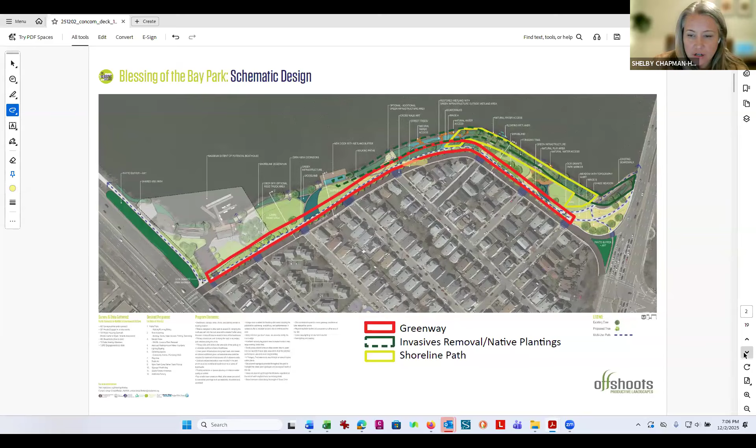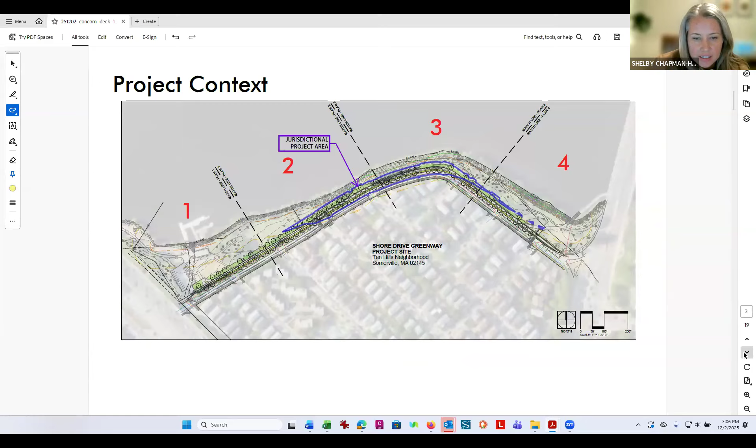So we're just going to really quickly take you through some existing site photos in case you're not frequently in this part of Somerville. So we'll go from page left to right, that's west to east, starting over by Mystic Ave, where the 1 is, over to the Fellsway by the 4. So if we go to the next page. So here you can see some existing conditions. This is over by the Blessing of the Bay Boathouse on the far west portion of the project site.

And when we get to the plan proposals, you'll see we were really working with DCR and City of Somerville to try to stick to that plan that the community developed back in 2018 and tried really hard to look at a lot of alternatives and really analyze the site to say, how can we maximize reusing existing hardscape? So you'll see that where we have now existing on Shore Drive a parking aisle, two-way drive aisle, and a bike lane, and then a sidewalk that's starting to get into the Blessing of the Bay Park area.

Our proposed adjustments go into the bike lanes and reclaim a little bit of that space to create a planted vegetated strip that has a couple of different functions between the roadway and the existing sidewalk. You can see there's some existing trees very close to where we are working. We are proposing removing 10 trees that are non-native or invasive species that would have significant impact from the work coming right up to the trunks. And you'll see in a minute, we have 88 new trees that we're proposing as well to replace those. So that's a very typical condition.

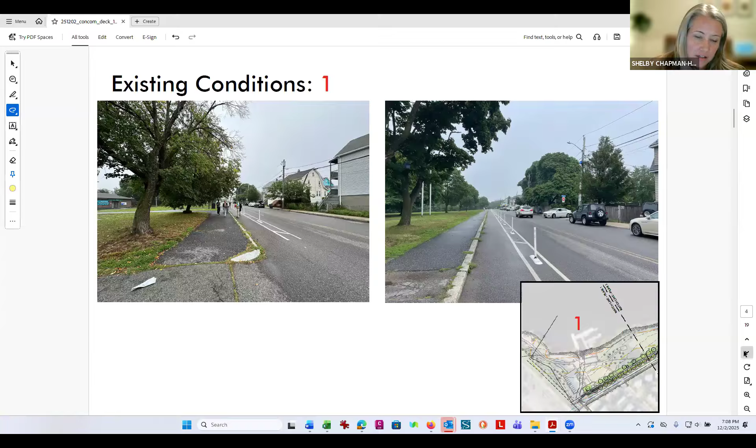And then we go down, moving towards the east here, you can see there's some areas where it's a little bit more opened up and park-like, but that same kind of condition of two drive aisles, parking, roadways, all very similar through that space. There's some areas where there's some traffic calming existing, which is really great that we're working with.

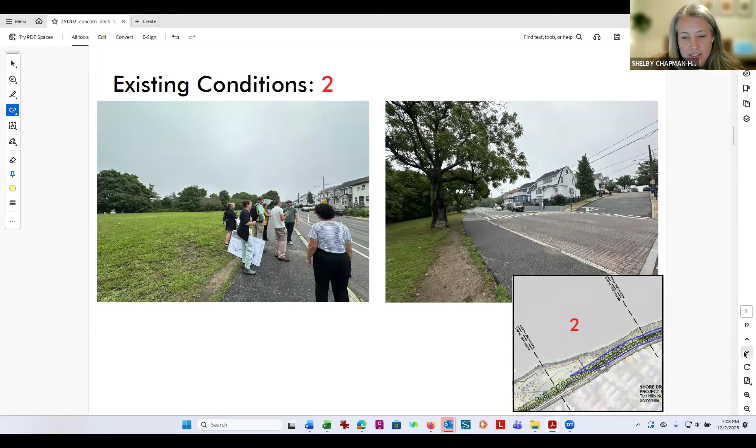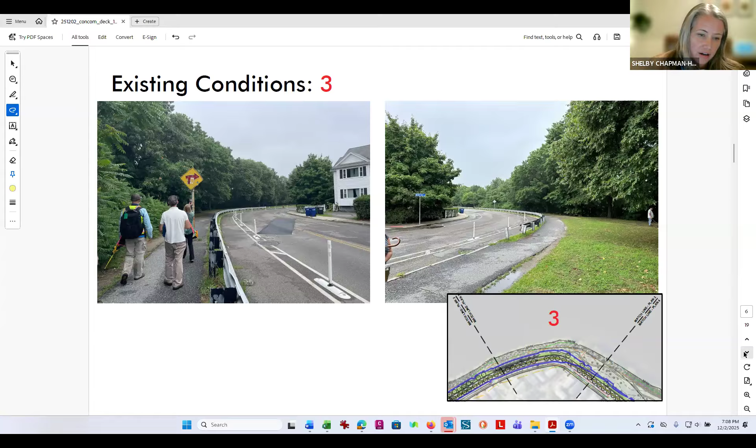And then if we go to the next plan, there is one area that gets a little bit pinched, but there's actually extra roadway width there due to the turning radius of the cars. So still plenty of space to work within for trying to really reduce our impact on the existing areas that aren't paved.

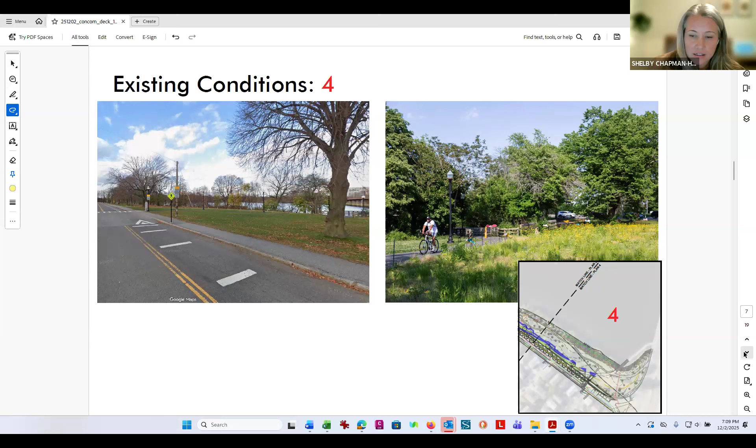And then if we go to the last slide, we are on the east side of the site near the boardwalk where you can go down under to get to Baxter Park and Assembly. This is the area where we've been to you guys a few times about various parts that we've picked off over time, including adding the native pollinator meadow and native shoreline restoration. So considering all of those aspects as we go through the proposed plans, I'll hand it over to Brian to start to walk us through the proposal.

We do have a couple resource areas within the park, and although there's multiple jurisdictional areas present, all of the proposed activities associated with this project are confined to the upland portion or the 100-foot buffer zone to the BVW and the bank.

And then the underlying soils, as you can imagine, it's mostly a fill type of material. And we did complete some site soil evaluations in December of last year, December 6th, almost a year from this current date. And that was used to help inform the stormwater management decisions that you'll see tonight.

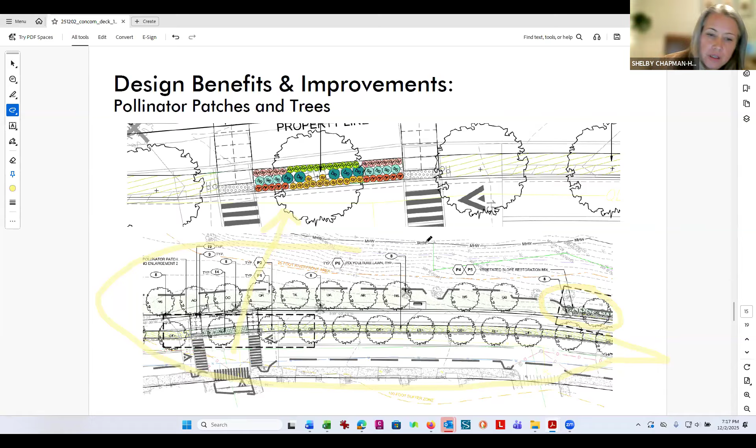And then there is a small patch of restoration on the far right side of that bottom overall plan. You can see a green hatch north of the shared use path, where that tight area is a little bit more wooded in the existing condition, restoring that back with appropriate native woodland edge species. That's it for the planting part. I'll just turn it back over to you, Brian.

Just walk through this really quickly. The roadway is being reduced, as I mentioned, so there's a reduction in the impervious cover. Because we are making this a shared multi-use path, there is some path widening that increases that impervious cover, and there's a little bit of trail surface aggregate that we're using in the connection points, and I think for some of the bench areas. But overall, we're still providing a reduction in impervious cover, and it's really swapping the pathway impervious with roadway. So we see that as a win as well.

I think it's also important to note that the lawn area, there's a pretty good reduction there, and that's due to the addition of that landscape strip that Shelby mentioned, as well as the pollinator plantings and some restoration plantings as well. So I think overall, it's a project that should provide some benefits to the abutting resources.

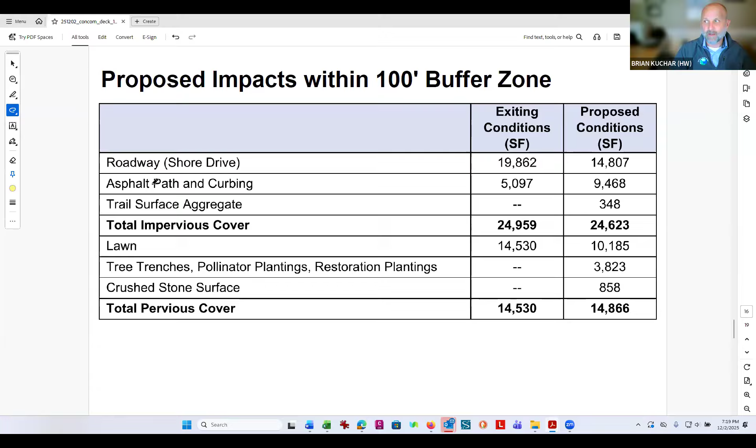And I think at that point, I am going to stop talking and let you all weigh in. I will keep sharing my screen in case there are things people want us to go back to, or if it's helpful when we're answering questions, or if not, I can stop sharing so we can all see each other again. Why don't you keep it up for now? Because I think some of the questions might want us to go back to them. I do want to open it up to fellow commissioners. Does anyone have any questions?

If no one does, I do have a couple questions. The first question I had is with regard to the tree removal plan, Shelby, that you referred to. I was wondering whether we have received a map that marks the trees that are planned for removal, and whether you've been working with Malik or our other tree specialists. Yes. So we've been working closely with the folks at PSUF, and we've been working with Vanessa Buckley. And in the plans in the NOI, there is a demo plan that shows the trees noted for removal.

Okay. And then I was just going to say that I can second that too. So I'm Meg Koglin. I have video off because I'm actually on vacation right now, but this is an important meeting, so I wanted to be here.

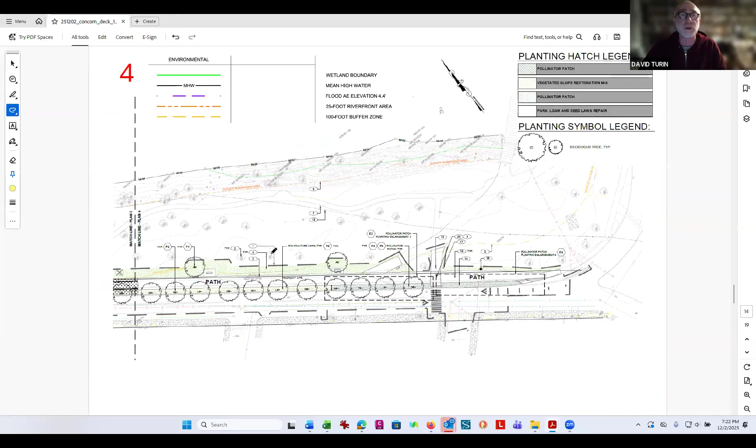The question I had about the path, and I feel like every different NOI, what I'm getting to is pervious versus impervious material for the path. You guys have chosen impervious. I know some projects come before us with the decision to put pervious pavement. Like 207. That decision. Yeah, I can speak to that. We did look at porous materials for the pathway. There were some challenges as it relates to the water table and the soil conditions there for infiltration. And in fact, we are under draining our tree trenches because of that reason, that we don't really have well-drained soils. And then we're trying to maintain separation from the water table as well.

So due to the high water table and the soils, and there were some other factors that weighed in as well from the design side, we decided that we would use just the more traditional pavement, but keep in mind that we are including the structural sand-based soils underneath, and we are using underneath that pathway for stormwater storage. So you are getting some of that benefit of the porous, you're just not getting the direct surface infiltration. And that's actually a good segue. Can you talk a little more about the stormwater treatment that you're putting in?

Sure. So there are the tree trenches, which I pointed out here. There's 4 of them. The way that this works is the water comes down the gutter line, enters into this small sediment forebay that would allow your solids and trash and debris to settle out. Easy maintenance that someone can go in and just clean that space. It would then overflow for the water quality volume, again, sized. Some of them are slightly under, but again, we're trying to meet to the maximum extent practicable based upon some of the utilities that are out there, which created some challenges as far as putting stormwater into the ground.

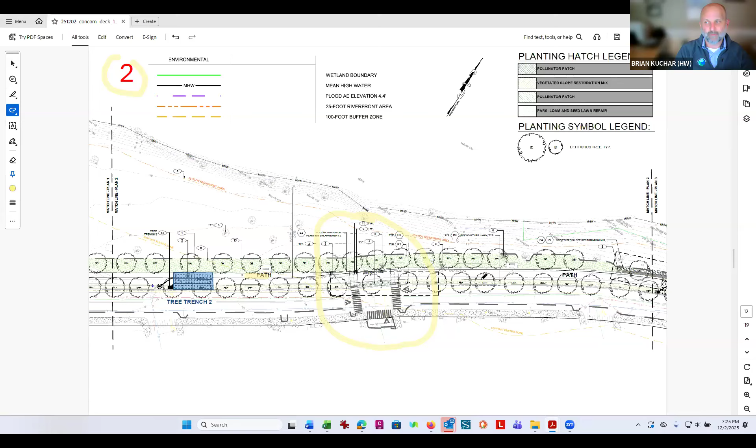So there'll be some sort of a regulator structure or a passive regulator structure to direct the first flow into that detention basin, and the overflow will then pop out again? Yep, that's absolutely correct. It will come into this, there'll be a slight depression, and there's an inlet in the curb line here, hopefully I don't lose my screen when I do this, okay, that will allow that water to get in.

And really what's regulating the flow is this structure here, which I believe is a 12-inch PVC drain basin, and then the pipe, which I believe is 6 inches. So that's really regulating the water quality. And then when this fills up, the water is just going to continue on in the gutter line. It's a more cost-effective approach because it doesn't require us to put a much larger structure in and make these connections. And it really allows this system to just take the water quality volume, or as I said, in this case, probably slightly less than the 1 inch, but definitely the ½ inch. Okay.

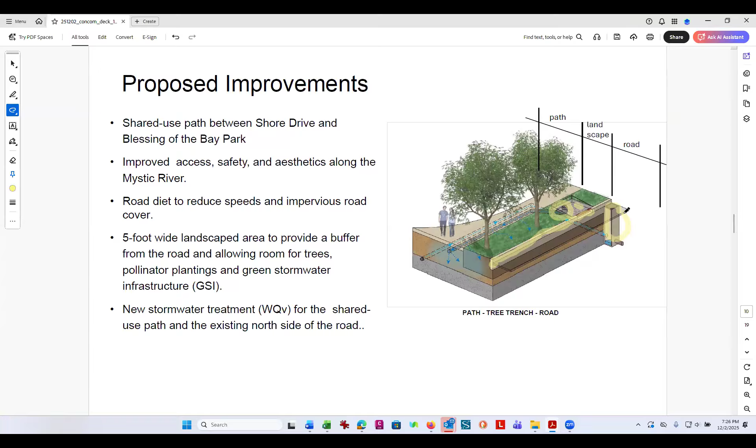Any commissioners, anyone else have questions? Yeah, I do. I was wondering, for the area that's in the 100-foot buffer zone, what are you doing for sediment controls? Just to clarify, you're talking about during construction, correct? Yes. So we do have an erosion control plan and site preparation plan that we submitted. We have silt sock. I can pull that plan up. Hold on a second. Are you seeing the new plan set, or are you still seeing the presentation? Yes.

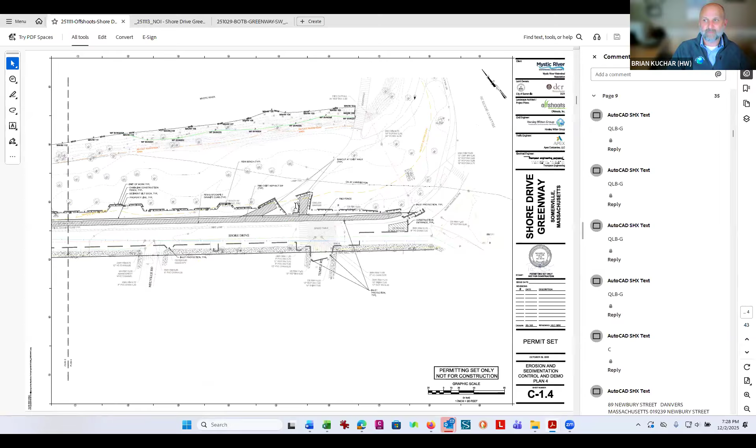So on the erosion and sediment control plans, we have a silt sock along the perimeter within the landscape to protect any runoff that may be leaving the site. The good news is this site's relatively flat, and I think stormwater management during construction should be not too complicated. We also have silt sacks going into all of the catch basin structures, not only the ones we're disturbing or working with, but any catch basin within the limit of work because of vehicle tracking or things like that. We also have made contingencies for some level of vehicle tracking once the construction access point is determined.

Yeah, go on, Michael. I was gonna say, you feel confident that nothing is gonna be running off from this work site into the river? As long as the contractor follows the erosion control plan, yeah, I think it should sufficiently protect it. And who's gonna be keeping track of this? In terms of the contractor, you mean? Yeah, because last time you guys were a little lax on your erosion controls, so I'm a little concerned about that.

I would love to learn more about what project it is that you're referencing, but the PSUF, the Public Space and Urban Forestry team, will be the project manager on this for construction. And we would be working very closely with Offshoots as the licensed landscape architect on the project, so we would be the ones that oversee construction. Okay. As the designers of record, we wouldn't be doing daily observation of construction, but we would be out there to do spot inspections, and we're usually pretty vigilant on the erosion control when we go out there.

So even if we're not specifically out there to check erosion control, we're typically looking where sediment may have accumulated, because that's when you run into problems, right? If they haven't cleaned up when the erosion controls are doing their job, and then you get a big rain event and it overtops it. And we typically manage by weekly site visits. And if there's a particular need to go more often, my experience on the PSUF team on active projects is we will make a point of going there if it's needed, but generally speaking, once a week.

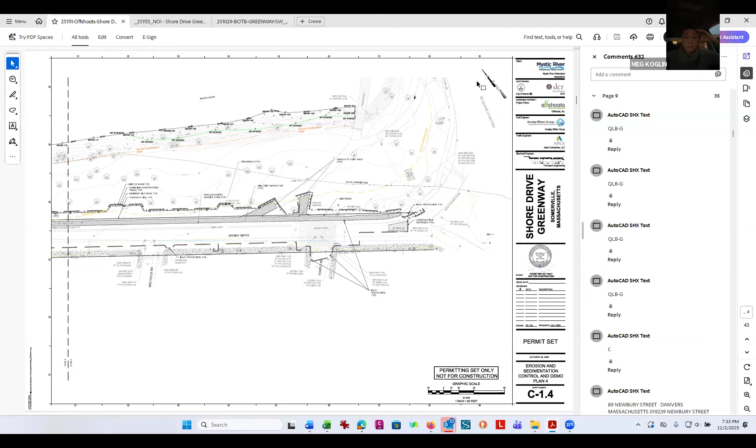I should have started with this. It looks like a great project. I think all the improvements along the waterfront there are broadly welcomed, and I should have said that before starting the questioning. So thank you for coming to us with this project. Thank you.

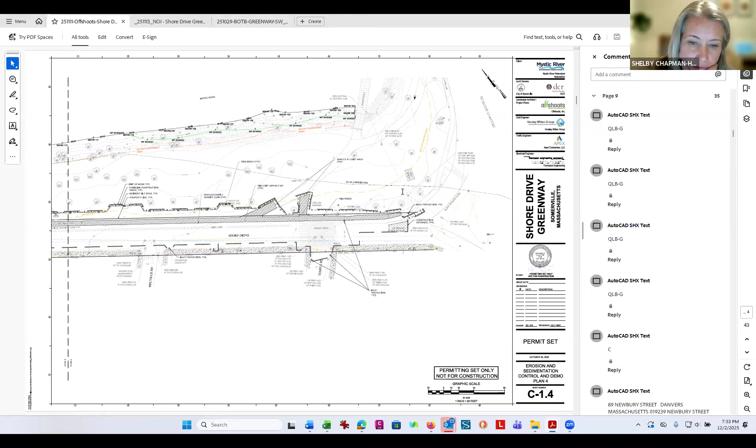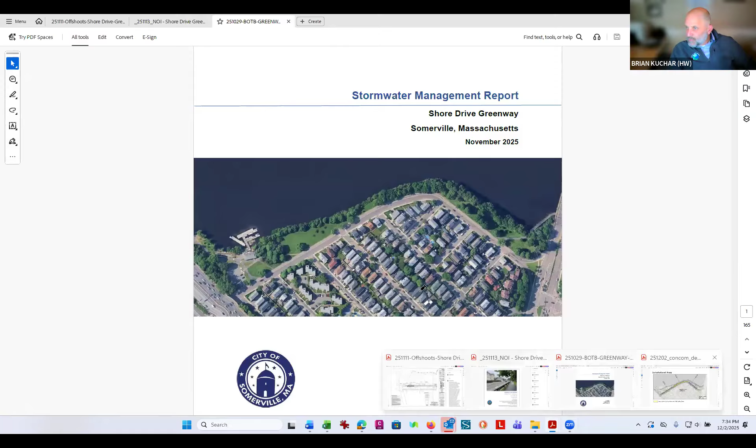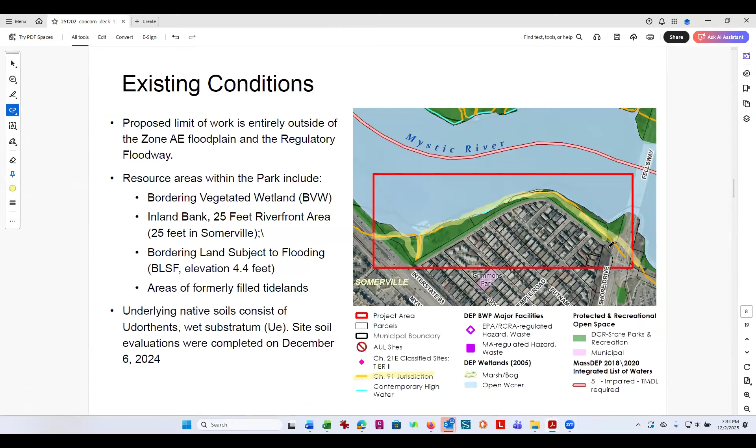Quick question. On one of the slides before, it looked like there was Chapter 91 jurisdiction nearby. Is any work taking place in Chapter 91? Very close nearby, but no. Isn't this all filled tideland? So Brian, do you want to point to it? It used to be a salt marsh. Oops, you guys are seeing the wrong plan. This is the line right here, Chapter 91 jurisdiction. Oh, okay. I think one of the previous projects was in it, and we came in front of you, but not this one, because it's so close to the road.

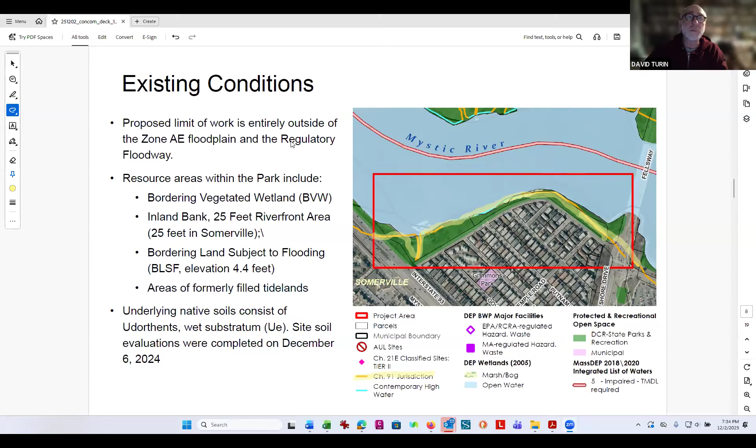What level of equipment are you going to have, and is it going to be parked on site? Specifically, I'm concerned about oil and gas filled equipment. The equipment on site would be similar to any sort of roadway project: excavators, dump trucks. We're not repaving the entire road, so you don't really have that level of construction, but it's going to be mostly earth moving with the excavation and the installation of the path.

Will the stormwater pollution prevention plan cover protection for that equipment? Yep, absolutely. That would be covered in the SWPPP. Yeah, and that's fine. I'm happy for us to defer to that. Okay. Anyone have any other questions? I've got a question before we move on.

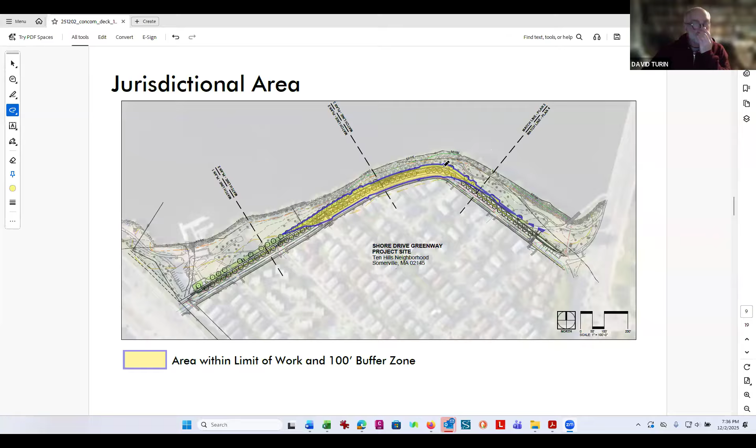Can we go back to the structural stormwater controls for a second? Can you walk me through some of the calculations for phosphorus and sediment removal? I'm specifically thinking about how much coordination you had done with the city departments to make sure you're meeting their requirements for redevelopment that would require you to remove a certain amount of phosphorus and sediment from the overall load of the final conditions that you anticipate.

Sure. So the stormwater practice that we're using is, as I mentioned, a tree trench, which gets a phosphorus reduction. I don't want to misspeak on this, but I can provide that information. But it does provide a level of phosphorus reduction because, as I mentioned, although we don't have great infiltrating soils, we are getting a level of infiltration and then plant uptake. So we did look at the phosphorus reduction.

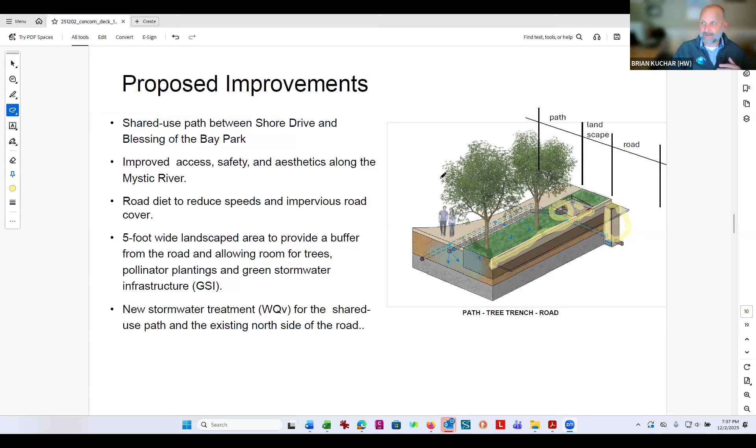I also mentioned we're trying to meet it to the maximum extent practicable because we do have some site constraints that limit what we're able to do both at the surface and below the surface due to the utilities. There's quite a few utilities because, keep in mind, as I mentioned, we're reducing the road width. So where a lot of this landscape buffer is located is currently road where the utilities are located.

So we did a ground penetrating radar survey to try to really pinpoint those utilities. So we are providing a level of reduction. I can give you additional information on that if required, but I don't have that right in front of me.

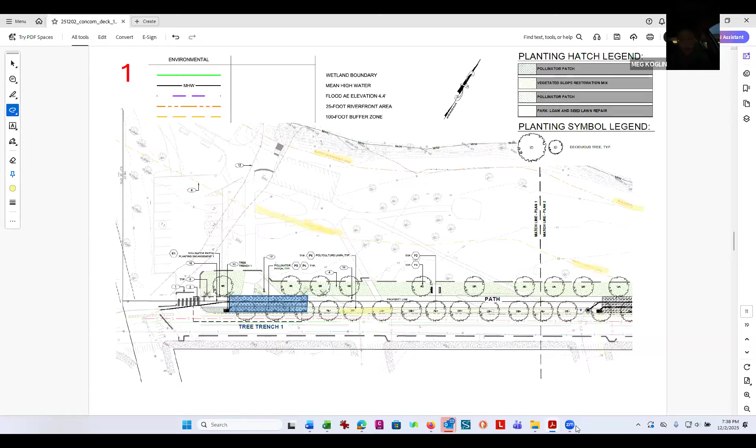And then what I'd like to add in terms of City of Somerville coordination is that over the past year, going back to early fall of 2024, we have been including the city's engineering team in all of the reviews. The director of the city's engineering team has actually been the one giving the review comments at each of these phases. And in the last 2 reviews, this coming one, and the final approval of construction documents, we also have included Stephanie, whose last name I'm forgetting right now, but she manages the city's GSI program. So she has been looking at these in detail, and we've been talking back and forth.

So I'm unfamiliar as to what the specifics are in terms of phosphorus counts. But I know that Stephanie is responsible for looking at whatever is required of our GSI. And I'm happy to follow up and facilitate if we need specific numbers.

Additionally, related to earlier comments, one thing that feels important is, just as Shelby mentioned, the closer view we had on the trees and choice of plantings, especially as it comes to the reality of maintenance and what we can and cannot keep up. That's been critically important in looking at this site, especially with learnings in other areas of the city, like Somerville Ave, and we feel confident in the maintenance that we can keep up.

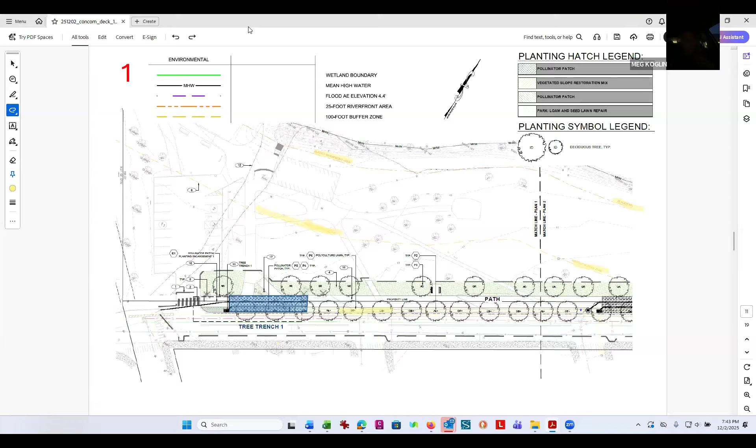Absolutely. I'm very happy you said this exactly when you did, because we are at one of those facilitation points. There has been coordination with all the teams who are responsible for stormwater in the city with engineering. But that specific question is something I'll bring forward when we provide our comments on the 90% construction document set before they go to 100%, due at the end of January, to make sure we answer: are we meeting the city standards? So thank you for that. Yeah.

Any other questions or discussion? Just out of idle curiosity, do we have a species list for the trees you're proposing to put in? Yes, you do. If it was in the plan, I missed it. I may have overlooked it. It is in the plans. There's a lot of sheets in there. About halfway back, at the beginning of the planting sheets, there is a comprehensive plant list page. There's a tree schedule. Okay, I'll look it up.

Thanks. This is another one we've been coordinating on too. Offshoots presented it, and as you know, Offshoots was a co-author or lead author on the pollinator action plan and species. And then Vanessa and three other PSEF members also looked at the list from Offshoots in previous reviews, and we will in this next one as well.

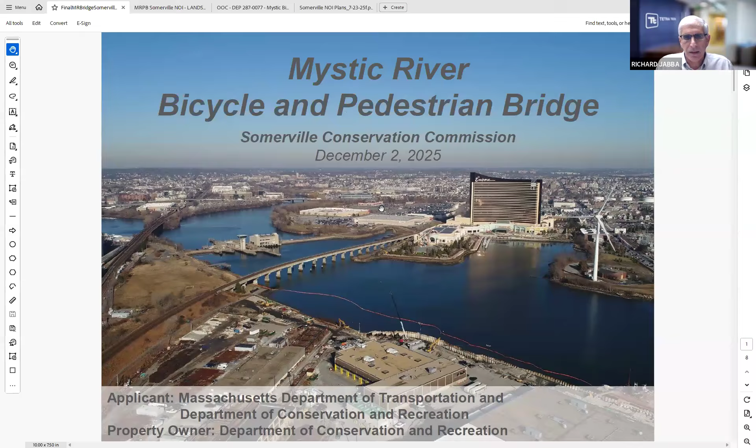So for this project, we're seeking an amendment to the existing order to add in the landscape plan. And I'll have just a few slides I want to present to go over what that is. I'll share the screen. There we go. Can you see that? Yes. Okay, great. So as I was saying, this is for MassDOT and DCR for the proposed bridge project. We were in front of you several months ago to get the order of conditions. Can you see the change in the screen now?

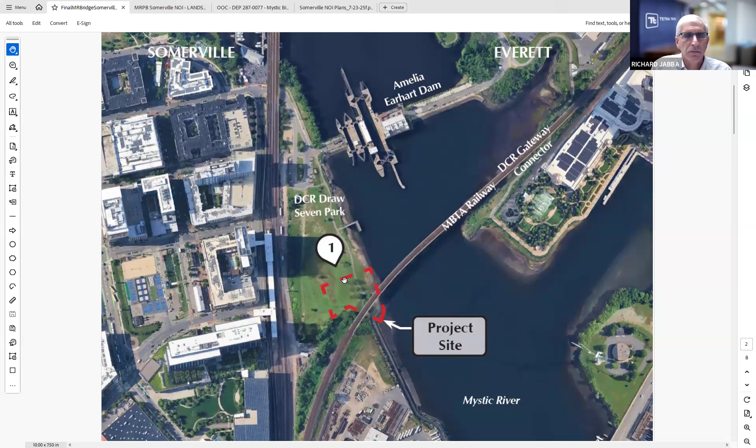Yes. Okay. So the proposed project, as you know, is the Mystic River Bicycle and Pedestrian Bridge. The landscape portion of this project is on the Draw 7 Park, as circled by this red line. This reflects existing conditions of the park just prior to construction, where the park is under construction at this point. So the purpose of this amendment is to have the landscaping that was approved for the Draw 7 Park construction be switched over to the bridge construction, because the park will be completed with their construction in the next few months, I believe. And then the bridge project won't start up for another year.

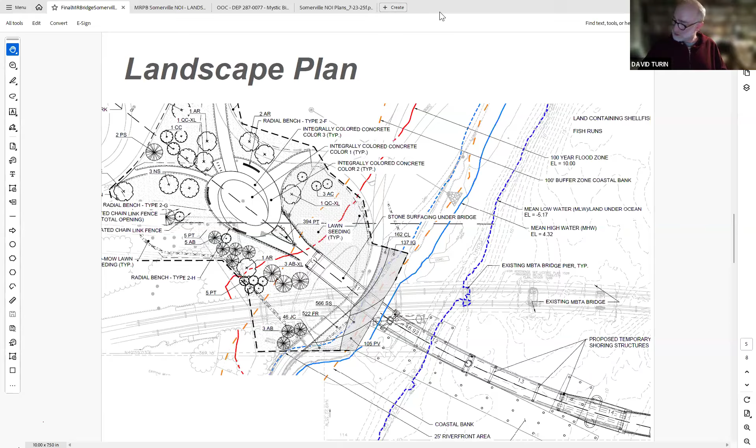Is anyone prepared to propose a motion to amend the DOT's order of conditions to include this landscape plan? I'll make a motion. I'll second it. Thank you. I will call the roll. Susan, yes. Newt, yes. Michael, yes.

Megan? I'm not sure if I need to abstain from this. Malik, I don't know if you know, because it's connected to Draw 7, and I recuse myself from that project, so I might just abstain from this vote. Okay. Well, in this case, you're voting on DOT's OOC. Right. But presuming we have enough votes without you, it's fine with me, and I think we do. We need 4. So if you're more comfortable abstaining, you may abstain. Yeah, I think I'll abstain from this. Okay. So Megan is abstaining and I vote in favor.

So it's 4-0-1 for people keeping track. And so Malik will draw up the modification and we'll let you know when there's something ready for you.